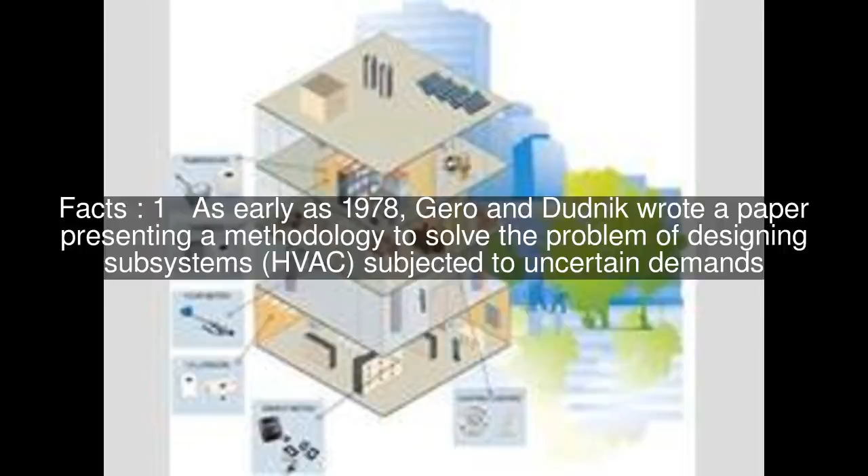As early as 1978, Gero and Dudnik wrote a paper presenting a methodology to solve the problem of designing subsystems, HVAC, subjected to uncertain demands. Uncertainty in weather prediction under changing climate, and uncertain weather data information due to the use of synthetic weather data files: 1. Use of synthetic years that do not represent a real year, and 2. Use of a synthetic year that has not been generated from recorded data in the exact location of the project but in the closest weather station.

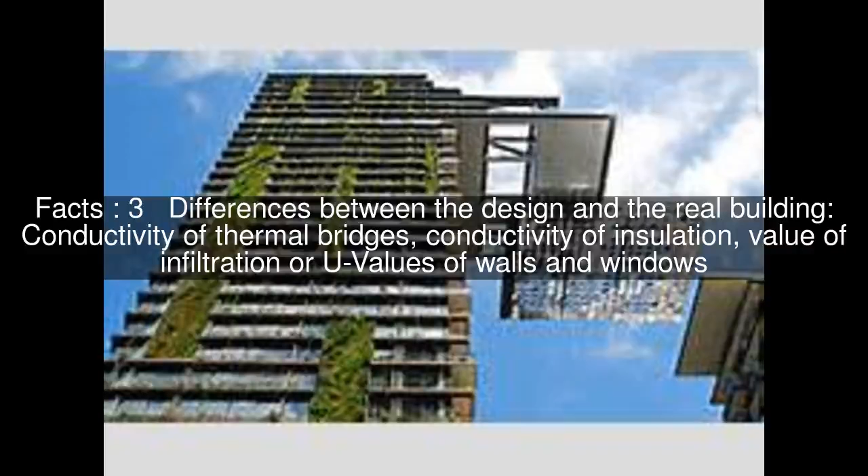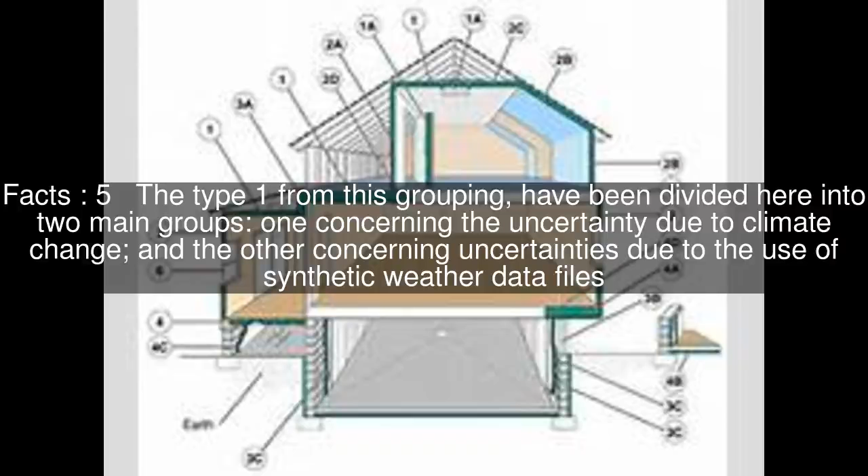Differences between the design and the real building: conductivity of thermal bridges, conductivity of insulation, value of infiltration or U-values of walls and windows. Doors and windows opening, use of appliances, occupancy patterns, or cooking habits. The type 1 from this grouping have been divided here into two main groups, one concerning the uncertainty due to climate change, and the other concerning uncertainties due to the use of synthetic weather data files.

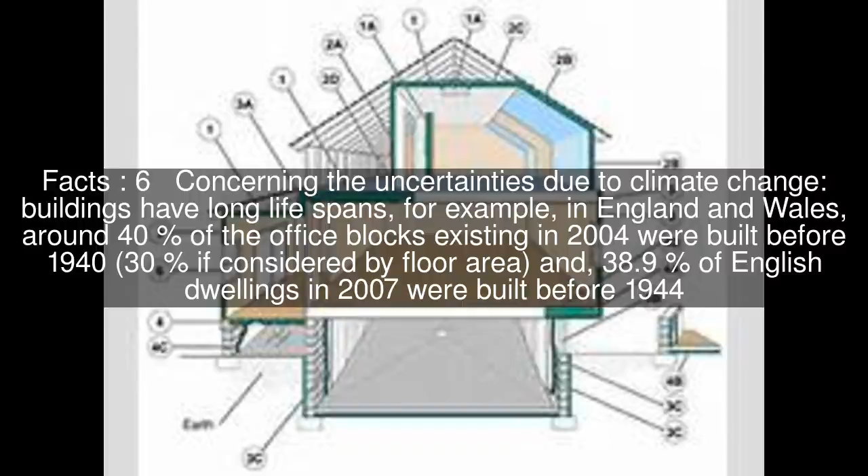Concerning the uncertainties due to climate change, buildings have long lifespans. For example, in England and Wales, around 40% of the office blocks existing in 2004 were built before 1940, 30% if considered by floor area, and 38.9% of English dwellings in 2007 were built before 1944. This long lifespan makes buildings likely to operate with climates that might change due to global warming. De Wilde and Coley showed how important it is to design buildings that take into consideration climate change and that are able to perform well in future weathers.

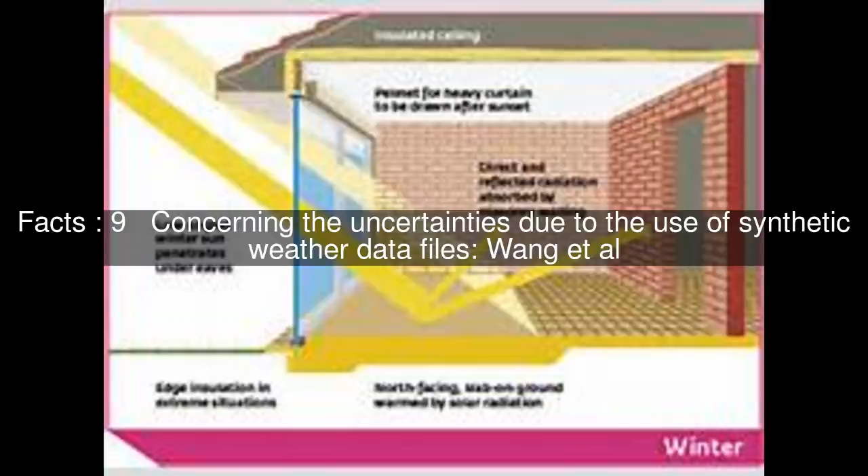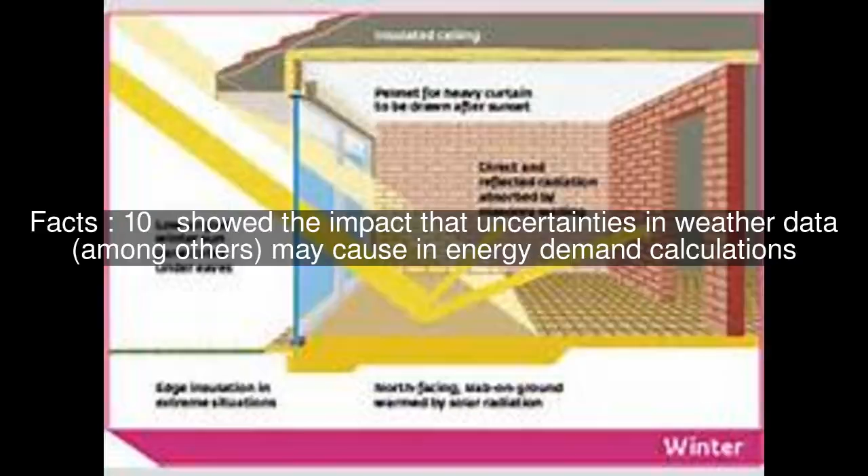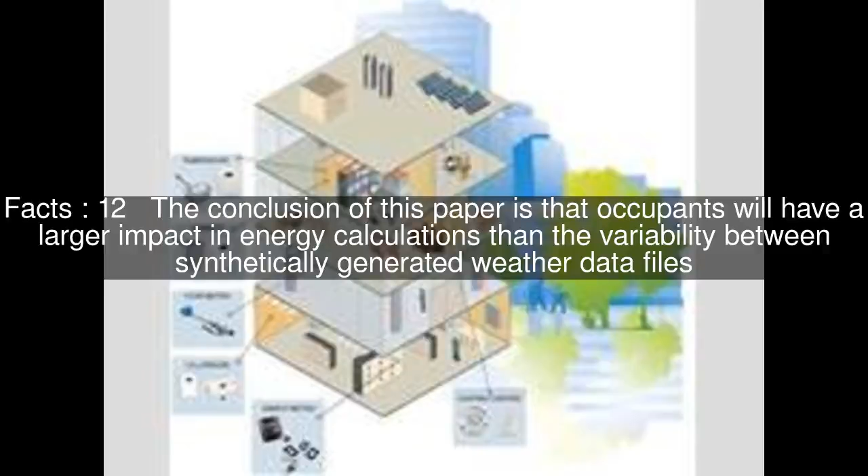Concerning the uncertainties due to the use of synthetic weather data files, Wang et al. showed the impact that uncertainties in weather data, among others, may cause in energy demand calculations. These deviations on the demand were smaller than the ones due to operational parameters. The conclusion of this paper is that occupants will have a larger impact in energy calculations than the variability between synthetically generated weather data files.

The spatial resolution of weather data files was the concern covered by Eames et al. Eames showed how a low spatial resolution of weather data files can be the cause of disparities of up to 40% in the heating demand. The reason is that this uncertainty is not understood as an aleatory parameter but as an epistemic uncertainty that can be solved with the appropriate improvement of the data resources or with specific weather data acquisition for each project.

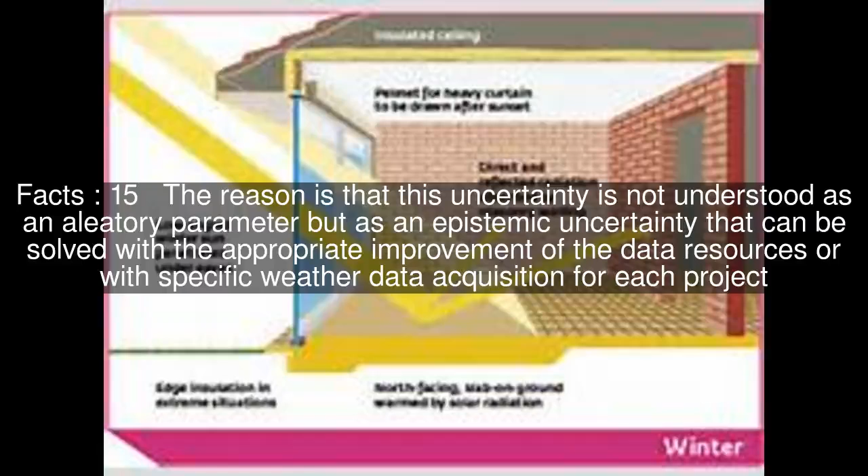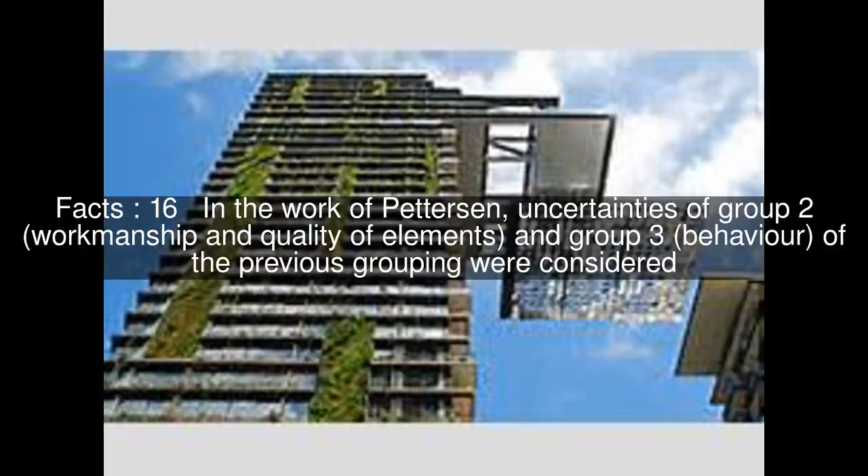In the work of Pettersen, uncertainties of Group 2, workmanship and quality of elements, and Group 3, behavior, of the previous grouping were considered. Pettersen showed that the total energy use follows a normal distribution with a standard deviation of around 7.6% when the uncertainties due to occupants are considered, and of around 4.0% when considering those generated by the properties of the building elements.

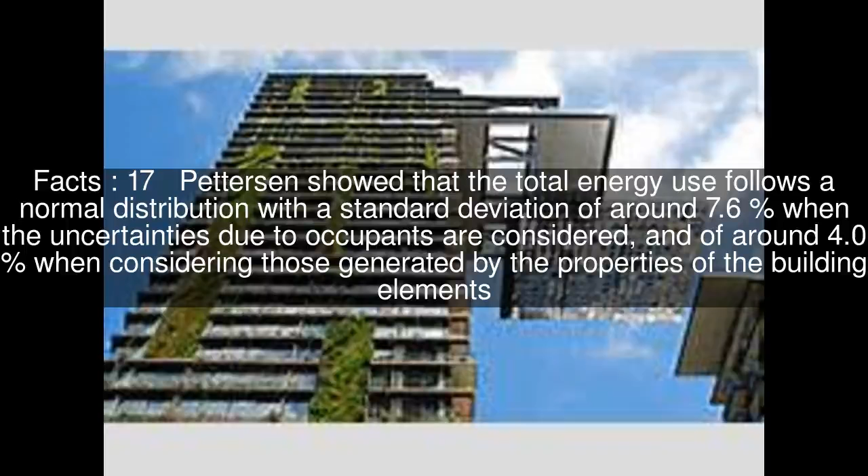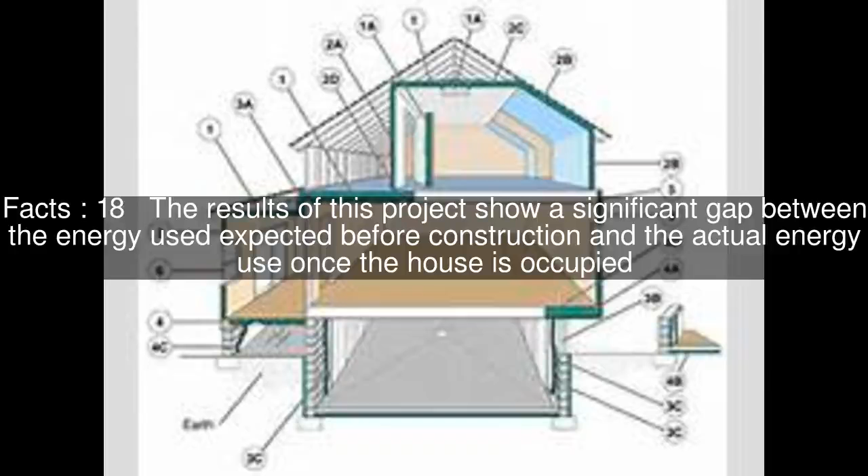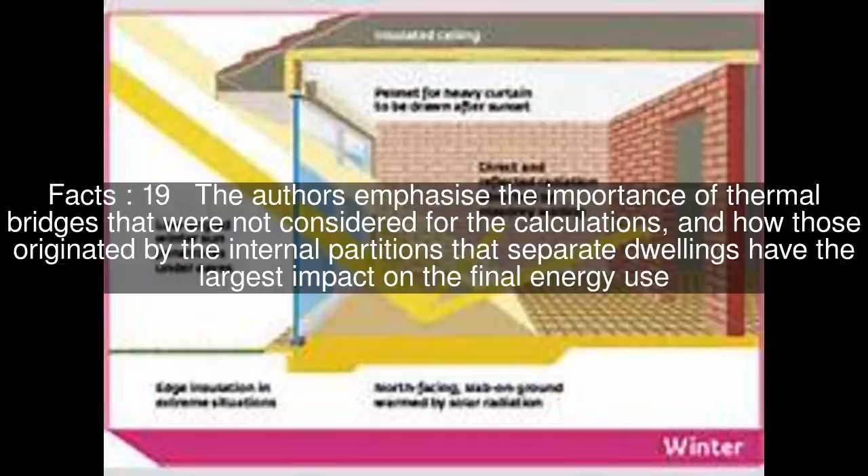The results of this project show a significant gap between the energy use expected before construction and the actual energy use once the house is occupied. The authors emphasize the importance of thermal bridges that were not considered for the calculations, and how those originated by the internal partitions that separate dwellings have the largest impact on the final energy use. The dwellings that were monitored in use in this study show a large difference between the real energy use and that estimated using SAP, with one of them giving 176% of the expected value when in use.

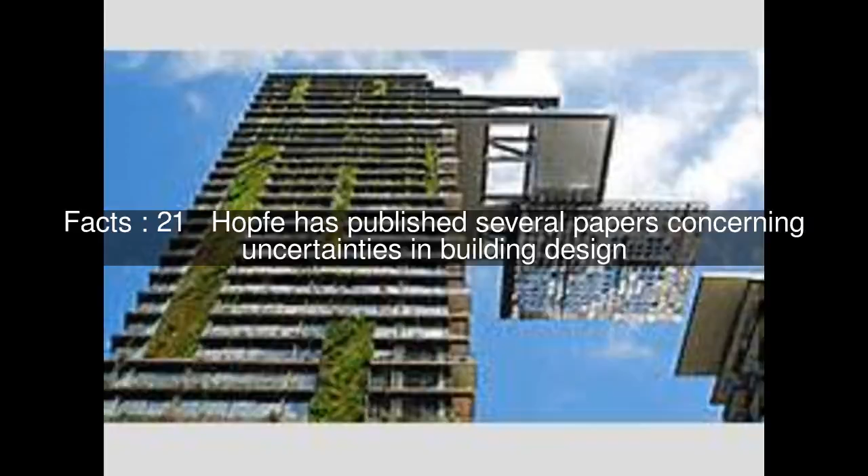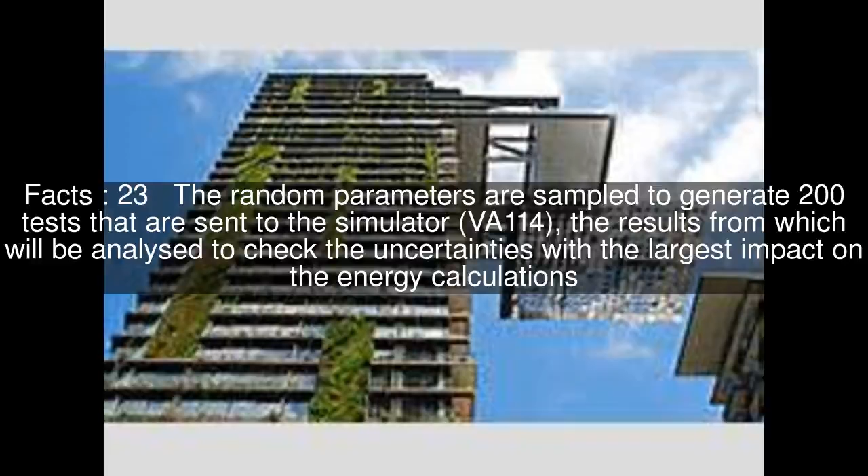Hopfe has published several papers concerning uncertainties in building design. A more recent publication at the time of writing looks into uncertainties of Group 2 and 3. The random parameters are sampled to generate 200 tests that are sent to the simulator, VA114, the results from which will be analyzed to check the uncertainties with the largest impact on the energy calculations. This work showed that the uncertainty in the value used for infiltration is the factor that is likely to have the largest influence on cooling and heating demands.

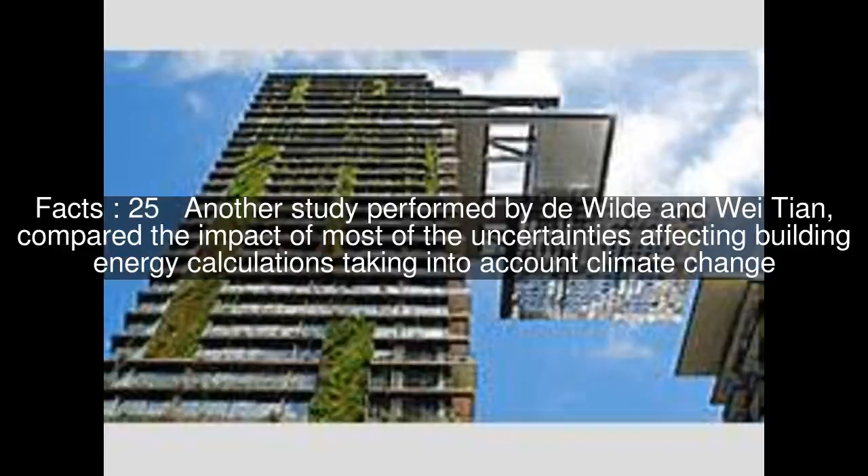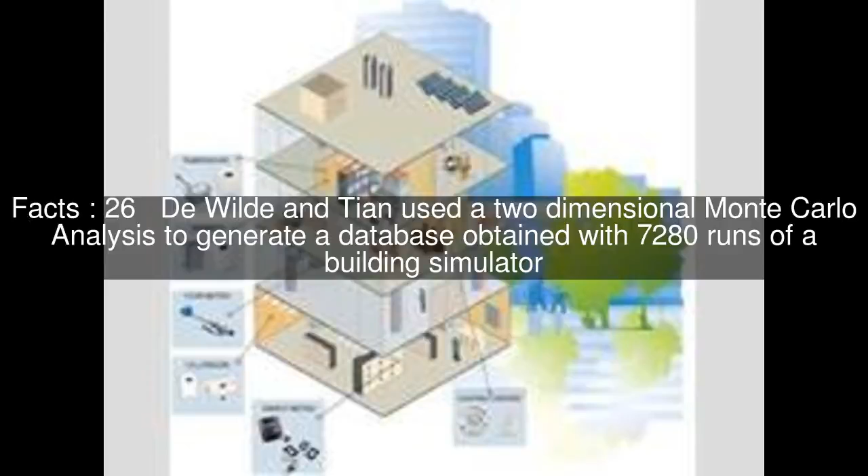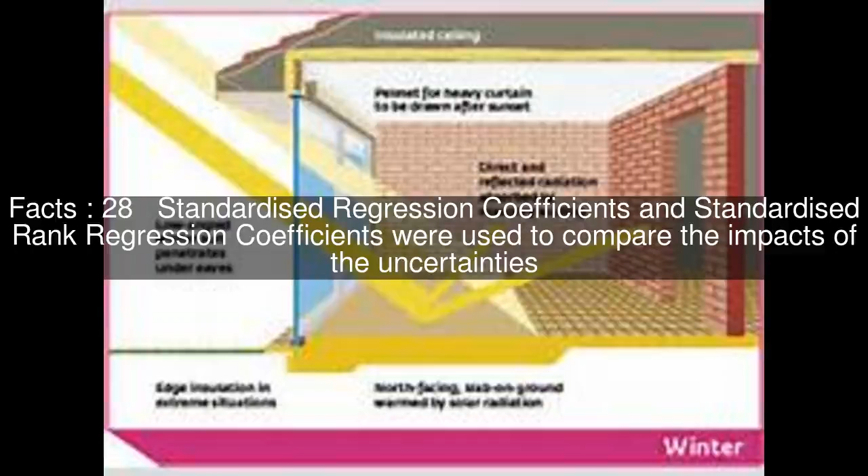Another study performed by De Wilde and Wei Tian compared the impact of most of the uncertainties affecting building energy calculations taking into account climate change. De Wilde and Tian used a two-dimensional Monte Carlo analysis to generate a database obtained with 7,280 runs of a building simulator. A sensitivity analysis was applied to this database to obtain the most significant factors on the variability of the energy demand calculations. Standardized regression coefficients and standardized rank regression coefficients were used to compare the impacts of the uncertainties. Their paper compares many of the uncertainties with a good-sized database, providing a realistic comparison for the scope of the sampling of the uncertainties.

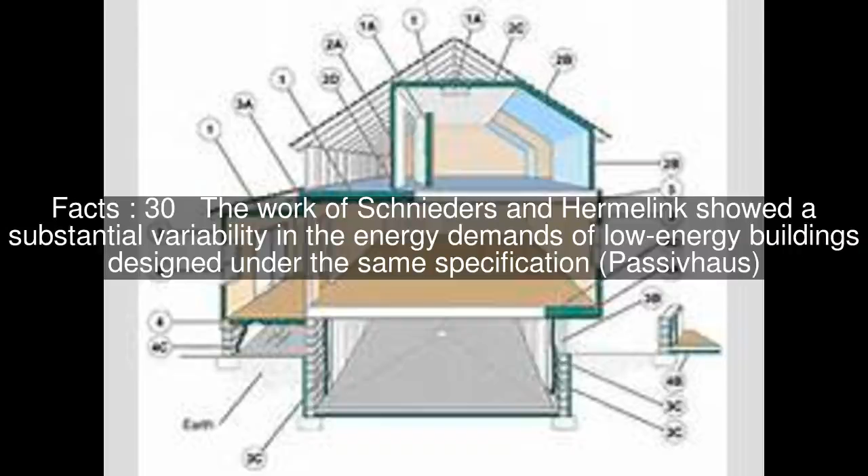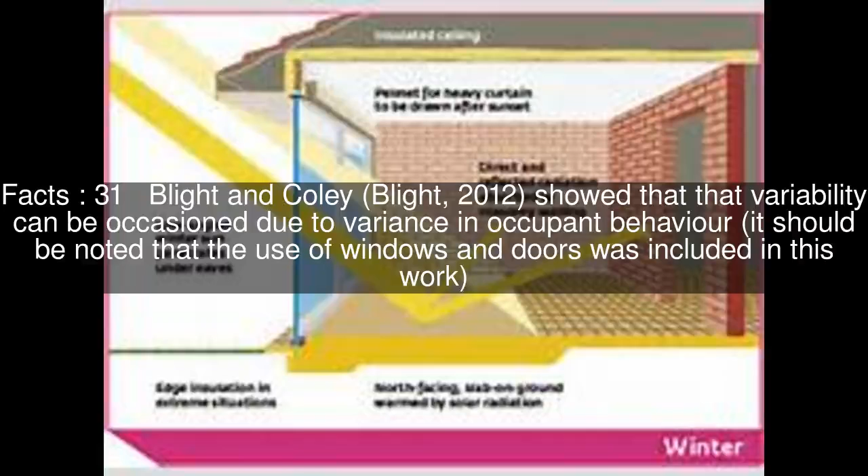The work of Schnieders and Hermelink showed a substantial variability in the energy demands of low-energy buildings designed under the same specification, Passivhaus. Blight and Coley, 2012, showed that variability can be occasioned due to variance in occupant behavior. It should be noted that the use of windows and doors was included in this work. The method was developed using the Time Use Survey, TUS, of the United Kingdom as a reference of real behavior of occupants. This database was elaborated after recording the activity of more than 6,000 occupants in 24-hour diaries with a 10-minute resolution.